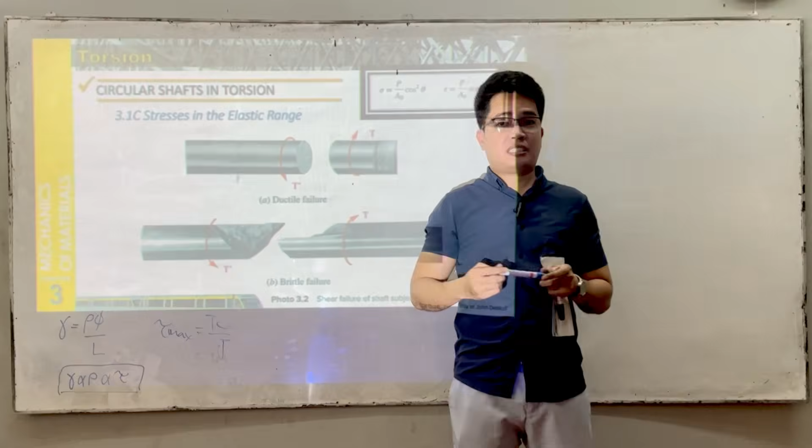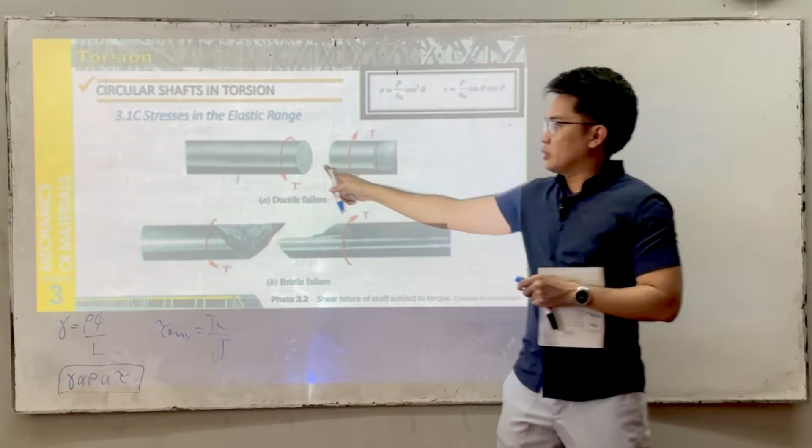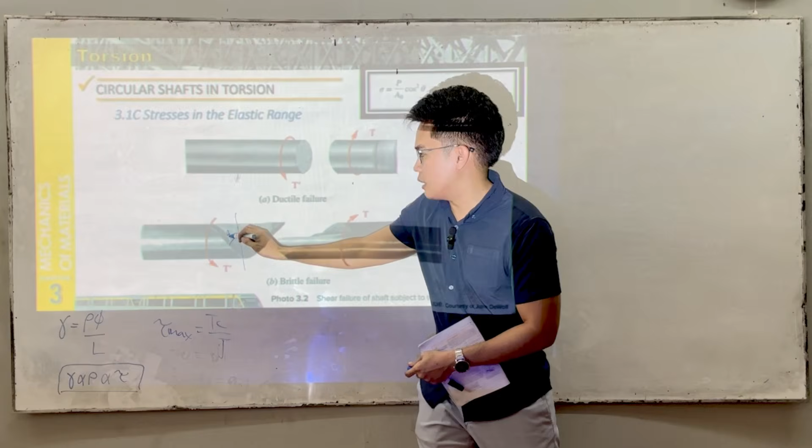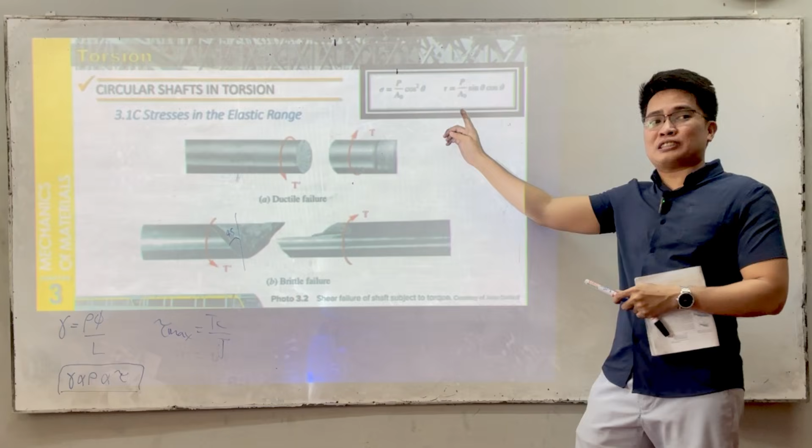So sa brittle natin, naka 45. Kung makikita nyo dito, yung shearing stress natin is maximum when theta is 45. So this theta here is actually the plane natin dito. Ano yung angle natin dito? This is at 45. So since the brittle material breaks at 45 degrees, the stress that contributes the most to the breaking is the shearing stress.

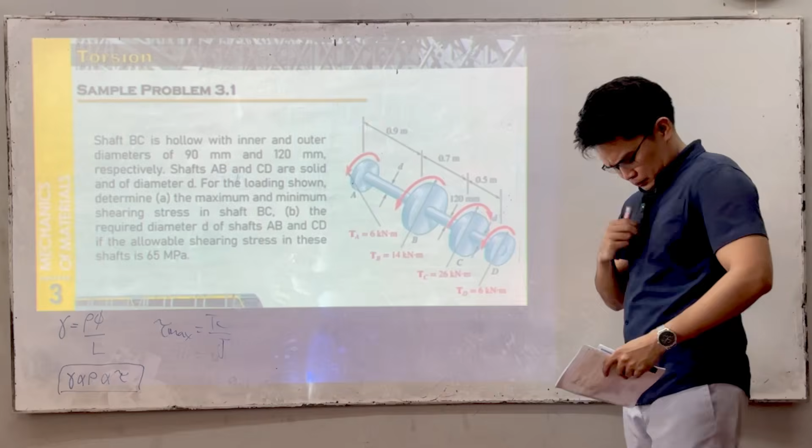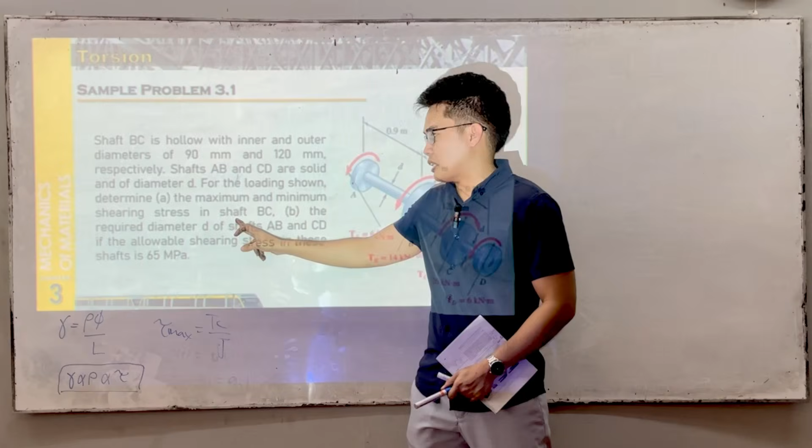Shaft BC is hollow with inner and outer diameters of 90 mm and 120 mm. Ito daw, yung shaft natin dito, hollow. Dito siya solid and then solid. And then naglagay tayo ng mga torque at different points. Find the maximum and minimum shearing stress in shaft BC. Saan yung maximum? Outer. Saan yung minimum? Inner.

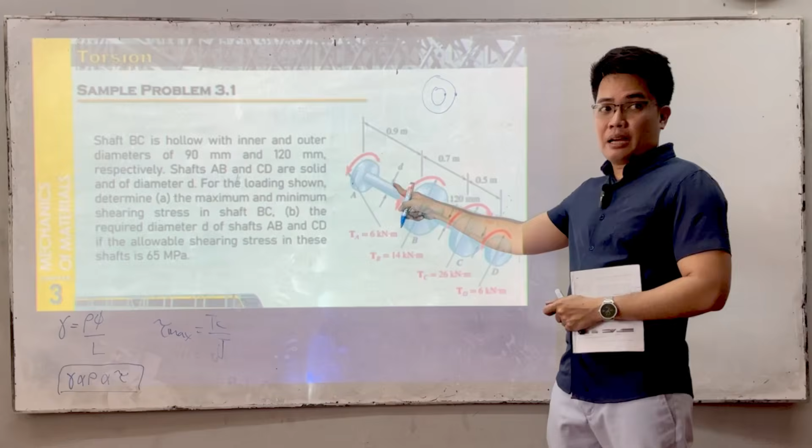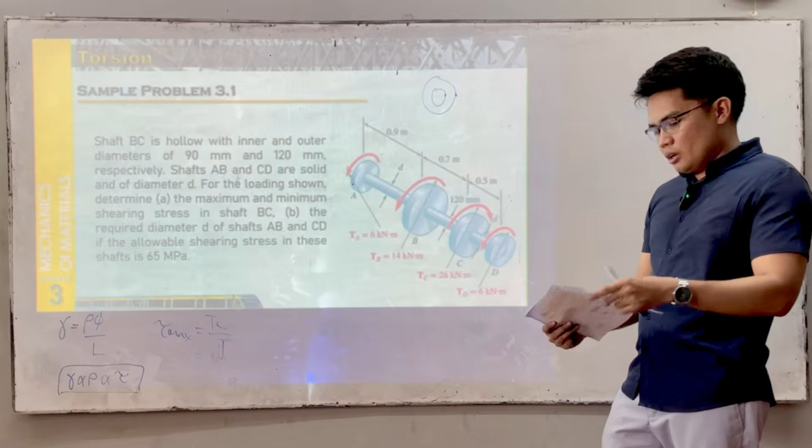And then sa B, the required diameter D of shafts AB and CD if the allowable shearing stress in these shafts is 65 MPa. Hindi natin alam yung diameter. Yung alam natin na diameter is 120, and we know it's hollow. D2 here is 120 mm. D1 here is 90 mm. The allowable shearing stress is 65 MPa.

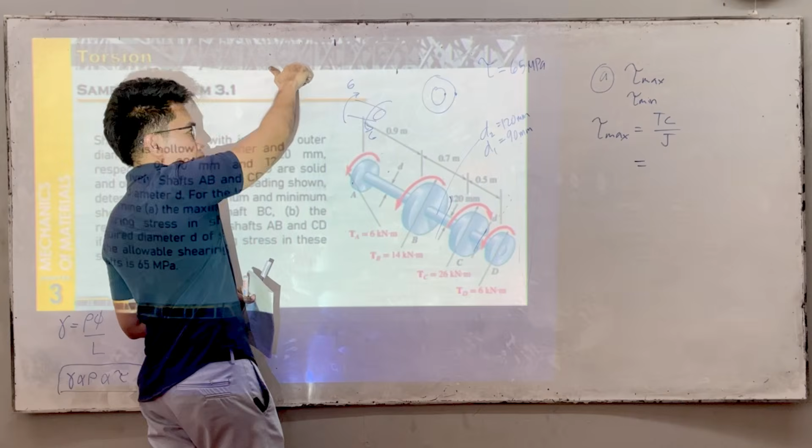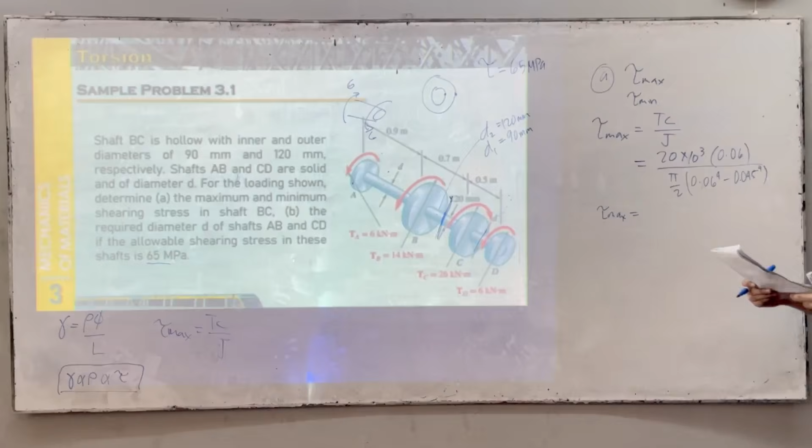So, ano yung torque natin dito? We have 6 at saka 26, opposite in direction, meaning dito is 20. So we have 20 times 10 to the 3, times C, which is 0.06, kasi radius. Over J, pi over 2 times 0.06 to the power of 4 minus 0.045 to the power of 4. So yung tau max natin dito is 86.23 MPa.

Now, tau min yung hinahanap sunod. Ratio lang natin. Tau max over tau min is equal to C2 over C1. So 86.23 over tau min is equal to 0.06 divided by 0.045. So tau min is 64.67 MPa. Very easy.

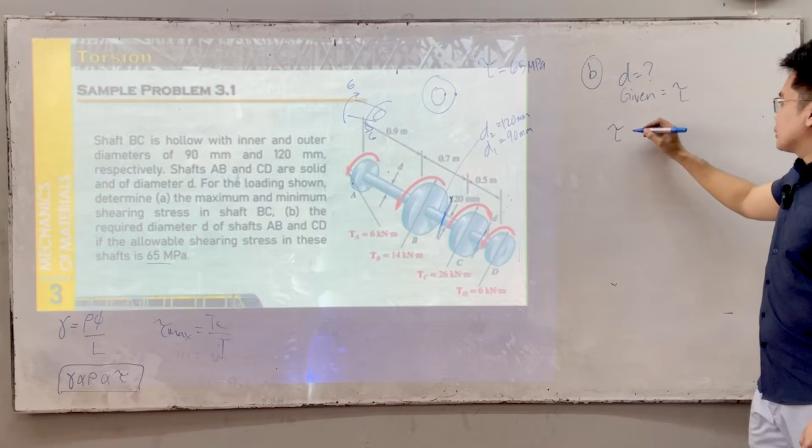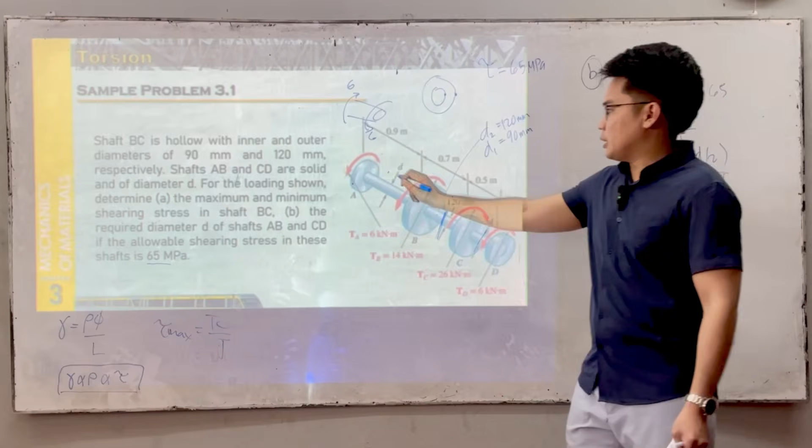So, we have pi over 2, D over 2 to the power of 4. This is our tau max. Substitute natin: 65 times 10 to the 6 is equal to 6 times 10 to the 3 times D over 2, over pi over 2 times D over 2 to the power of 4. Based dito na equation, makukuha natin si D, which is 77.8.